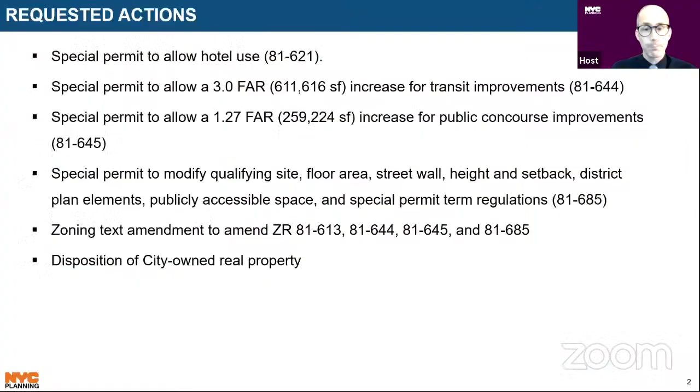Good afternoon, I'm Ezra Moser. This is an application by Commodore Owner LLC, a joint venture between RXR Realty and TF Cornerstone, for a new office and hotel development in East Midtown. Next slide, please.

The applicant is requesting 4 special permits, a text amendment, and a disposition of non-residential city property to facilitate a Class A office building and a hotel in East Midtown within Manhattan Community District 5. They're using a number of East Midtown special permits with some tweaks to the text to allow for the scale and unique location of the proposed development, as well as the size of their public improvement package.

The requested special permits are to allow use group 5 hotel use, which would result in a 500 key transient hotel; to allow a 3 FAR bonus for the provision of transit improvements; to allow a 1.27 FAR bonus for the provision of public concourse spaces; and to modify various East Midtown bulk provisions. Next slide, please.

The proposed development would contain 2.25 million square feet of office and hotel floor area. It would rise to 1,642 feet, with approximately 85 stories. It would undertake significant transit improvements and create a brand new transit hall for Grand Central Terminal. Additionally, it would provide 25,000 square feet of outdoor public space in the form of 3 elevated terraces that would wrap around the building and offer brand new views of the surrounding area.

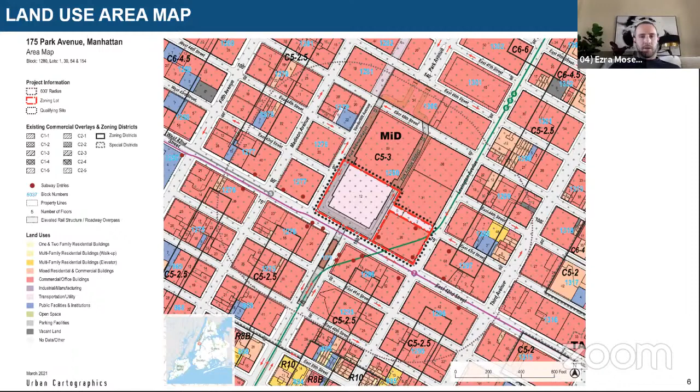Next slide, please. So the East Midtown subdistrict was established in 2017 in order to facilitate a new generation of state-of-the-art Class A office towers. The map on the left shows the location of the subdistrict within the Special Midtown District, and the map on the right shows the subdistrict with its various sub-areas. The development site is outlined in red on both slides.

Under the East Midtown regulations, sites that meet certain criteria are termed qualifying sites and are eligible to increase their maximum permitted FAR via a series of chair certifications. To jog everyone's memory, these include district-wide transfer of landmark floor area through the completion of pre-identified transit improvements in the public right-of-way, or for buildings built before 1961, through the reconstruction of overbuilt floor area.

Once developments achieve their maximum permitted FAR through these as-of-right mechanisms, they can increase their floor area by another 3 FAR, up to a total of 30, via 2 special permits for the provision of either site-specific transit improvements or by providing a public concourse. As a quick reminder, a public concourse is a public space that can be either indoors or outdoors. Next slide, please.

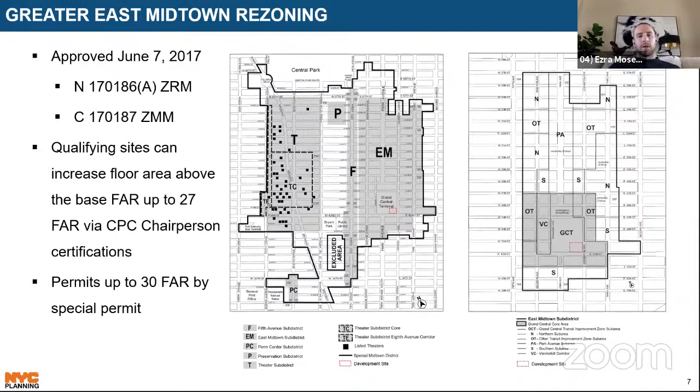Here you can see the development site in orange, side by side with the Grand Central Terminal zoning lot in blue. The development site is block 1280 lot 30, currently improved with the Grand Hyatt, with 275 feet of frontage along 42nd Street and 208 feet along Lexington Ave, for a total lot area of 57,000 square feet. The adjacent Grand Central Terminal zoning lot, colored in blue, is comprised of lots containing the terminal structure and Grand Central Market. It also includes subterranean transit parcels and an air rights lot, which was purchased by an affiliate of the applicant in 2017. That zoning lot has 146,580 square feet of lot area.

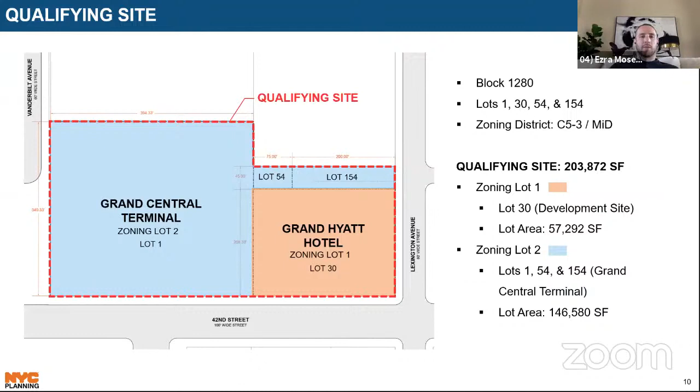Here's an elevation from Lexington Avenue. The qualifying site includes the Grand Central Market Building, which will remain.

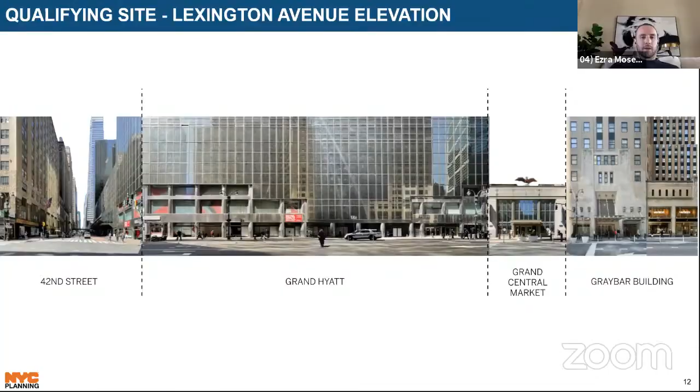As we also know from experience, its transit and pedestrian network can be extremely congested and confusing to navigate.

The development site, highlighted here in orange, is closely integrated with Grand Central Terminal and has multiple levels of transit infrastructure directly below it. The subway mezzanine, highlighted in green, occupies nearly 30,000 square feet of the below-grade footprint, more than half the development site's area.

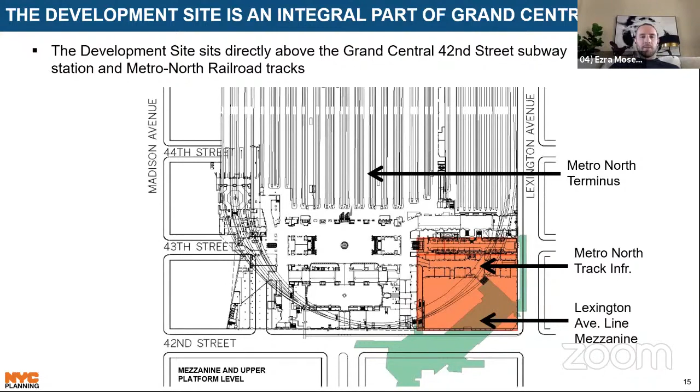Additionally, there are multiple layers of track infrastructure below that, including the Lexington Avenue platform, highlighted in green, and Metro North tracks, labeled with an arrow. The Flushing Line platform, highlighted in purple, runs at the edge of the development site's footprint. The development site is also directly adjacent to the terminus of both Metro North and the future LIRR terminus, highlighted in yellow. This extraordinary level of integration presents structural challenges for redevelopment, as well as opportunities for significant on-site transit improvements.

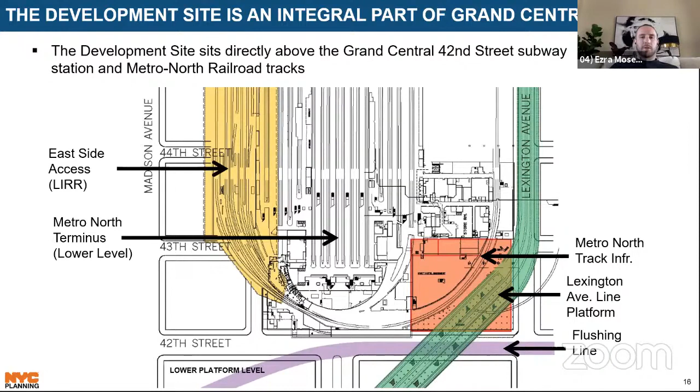At grade, the development site is similarly integrated with Grand Central Terminal's infrastructure. The Lexington Passage runs east to west across the site, providing access from Lexington Avenue to the terminal's main hall. Three subway entrances are located on the development site.

The Lexington Avenue entrance provides access from Lexington Avenue down to the subway mezzanine, also known as R239, or more colloquially, the Strawberry Stair. It was widened and improved recently as part of One Vanderbilt's suite of transit improvements.

Now, to familiarize you with the site further, I'll briefly show photos of two of those subway entrances, which the applicant proposes to renovate and expand as part of the proposed development.

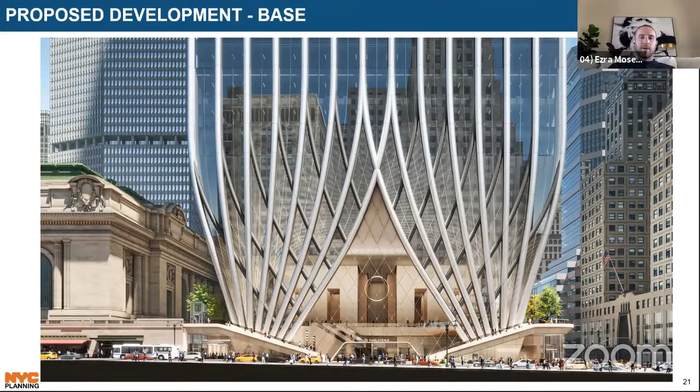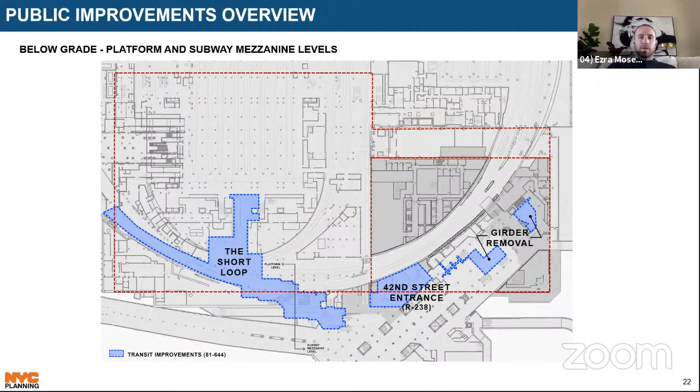As you'll see in the next slide, the proposed development will completely overhaul the 42nd Street entrance, which will also expand the mezzanine and make for a dramatically improved user experience. All the improvements seen here are part of the 81-644 transit improvement bonus, which is why they are shaded in blue.

At grade, seen here, the proposed development would undertake four major improvements. One, it would renovate the Lexington Passage and make it double height, seen in green along the northerly edge of the development site. Two, it would create a brand new transit hall, providing a three-way connection between the Lexington Passage, the 42nd Street Passage, and the subway station.

The transit hall is visible in green, running along the west or left-hand side of the development site. Three, as discussed on the previous slide, it would dramatically expand and improve the 42nd Street subway entrance, seen in blue just south of the transit hall. And four, it would relocate and refurbish the Lexington Avenue entrance, seen along the easterly edge in blue.

These are color coded to show that the two new subway entrances are part of the section 81-644 transit bonus, depicted in blue, and that the transit hall and Lexington Passage are part of the 81-645 public concourse, depicted in green.

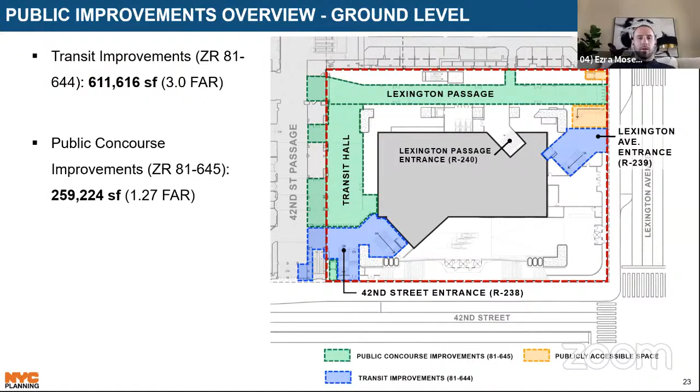Now I'll move through these improvements in detail, starting with the below-grade transit upgrades.

Here's the short loop connector in the context of the full suite of transit improvements. The short loop is a once-in-a-generation improvement that would transform an abandoned railroad track into a direct connection between Metro North's lower platform level, the future East Side Access Concourse, which you can see in the far top left-hand side of the screen, and then the subway mezzanine.

The mezzanine here is shown in green. Under current conditions, Metro North commuters arriving on those lower platforms must travel up to grade and through the terminal complex before traveling back down below grade again to access the subway mezzanine.

Future Long Island Railroad commuters would similarly be required to take escalators up into 1 Vanderbilt's transit hall before making their way back down to the subway mezzanine by the shuttle passageway in Grand Central Terminal. As currently designed, users for both Metro North and the Long Island Railroad are required to take circuitous and inefficient routes to access the subway, which the short loop would address.

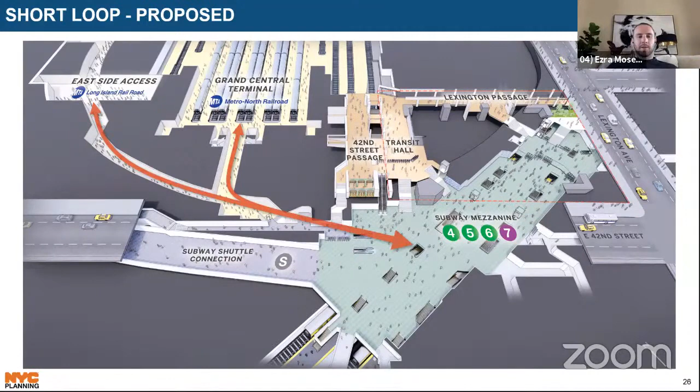The applicant would remove multiple girders and empty back of house spaces from the mezzanine level of the Grand Central 42nd Street subway station, which you can see here in various shades of green.

Removing these girders would add over 2,600 square feet of circulation space and allow for new turnstiles at the mezzanine's northern end. The mezzanine would be transformed from the labyrinth that we all know today into a more legible space with very clear sight lines. The removal of these obstructions and the new sight lines would redistribute passengers from visible but congested platform stairs to ones that are currently obscured and underutilized.

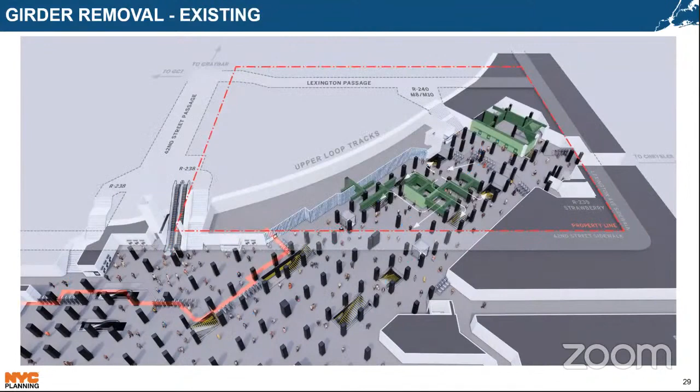Since there was a lot of information on these two slides, I'm going to show them again. Here's the existing mezzanine, with the girders highlighted in green. Here's the same view in the proposed condition with the girders removed. You can see how much more open and streamlined it is.

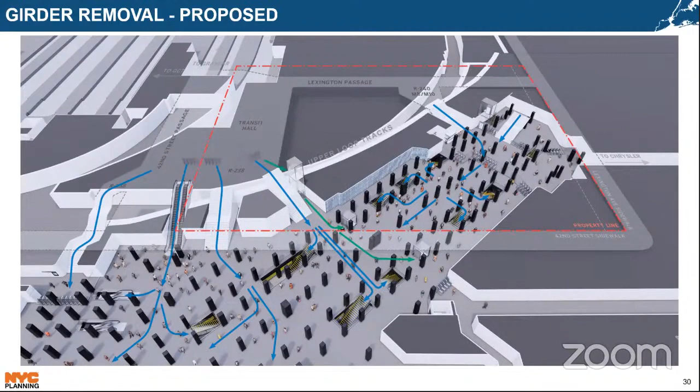Here's another existing conditions view at the northern end of the mezzanine. This white wall in the middle of the shot is one large girder. Here's how that same view would look in the proposed conditions, revealing the relocated strawberry stair entrance in the center of the screen.

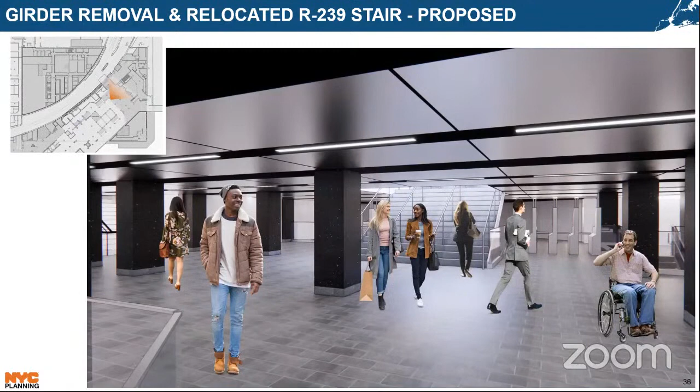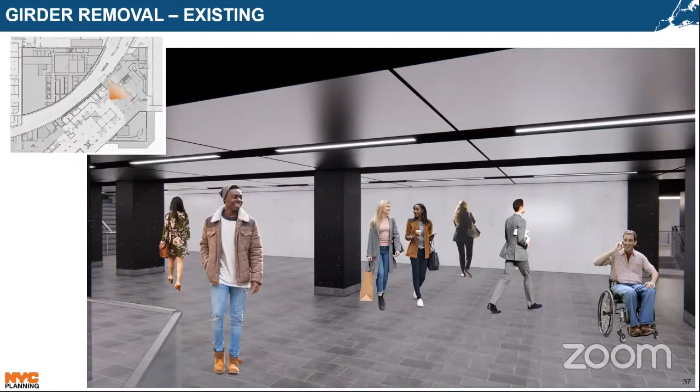I'm going to show the same before and after sequence again for emphasis. Here is the existing conditions view at the northern end of the mezzanine, and here it is in the proposed conditions with the girders removed.

This slide highlights the integration between the proposed transit hall and the expanded 42nd Street subway entrance, both of which are stacked to the westerly side of the development site. Additionally, the proposed transit hall would remove large portions of the wall separating it from the 42nd Street passage. This slide also shows the relocation and expansion of the Lexington Avenue entrance on the right-hand side of the image. The building's street walls would be set back from both Lexington and 42nd Street, expanding the effective width of those sidewalks.

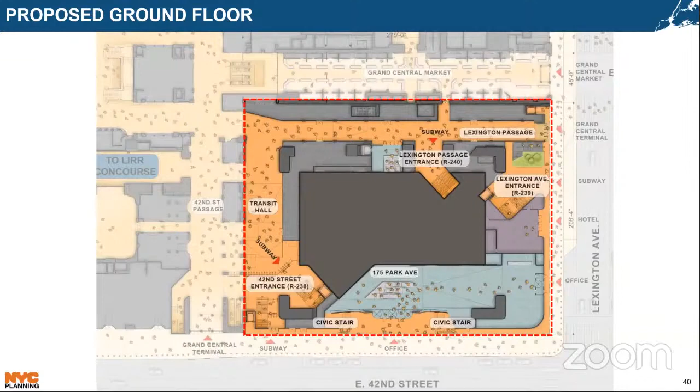Overall, key takeaways: the public realm will constitute a significant portion of the proposed development's ground floor.

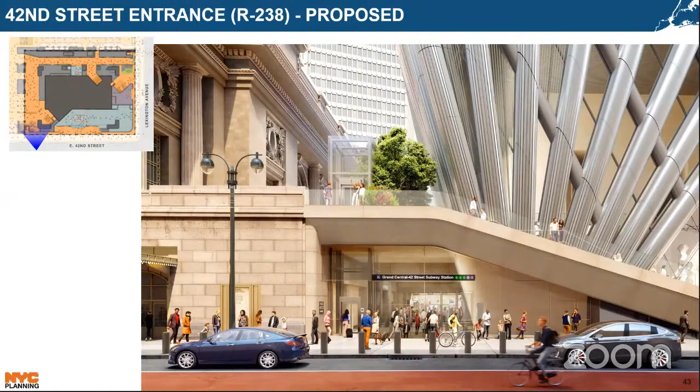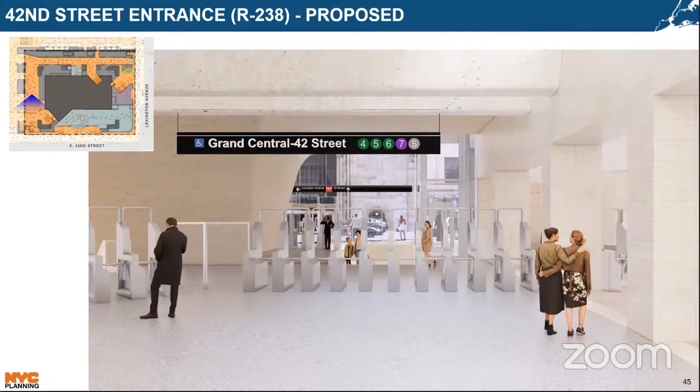Turnstiles would be relocated from the mezzanine level up to the ground floor, which would increase the mezzanine level's paid zone by about 3,500 square feet and relieve congestion and improve circulation. Placing the turnstiles here at grade will also help clearly indicate the subway entrance to users within the terminal.

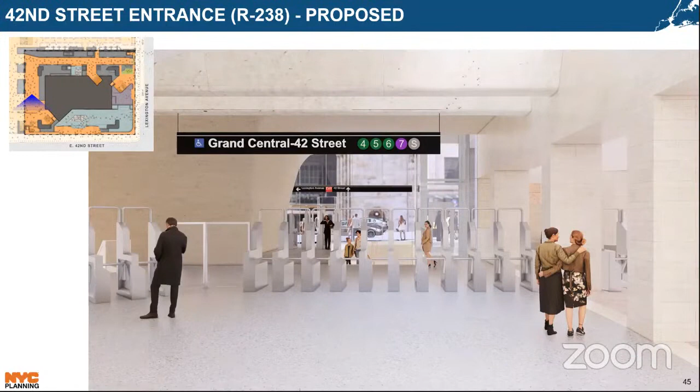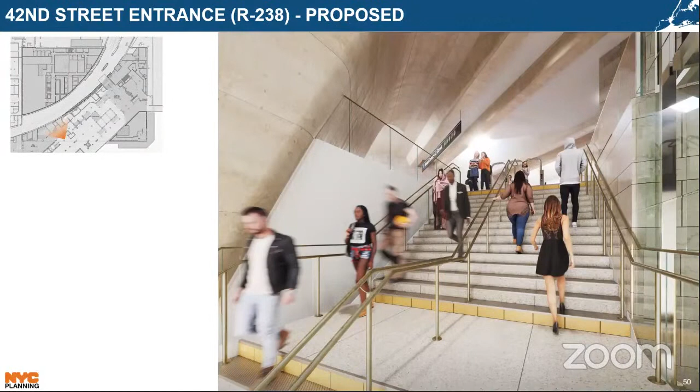Here's a similar view in the proposed conditions. You can see how the stairs have been relocated away from the escalators and the fare array has been redistributed to the ground floor, both of which would ease bottlenecks. Now we will move on to the Lexington Avenue entrance.

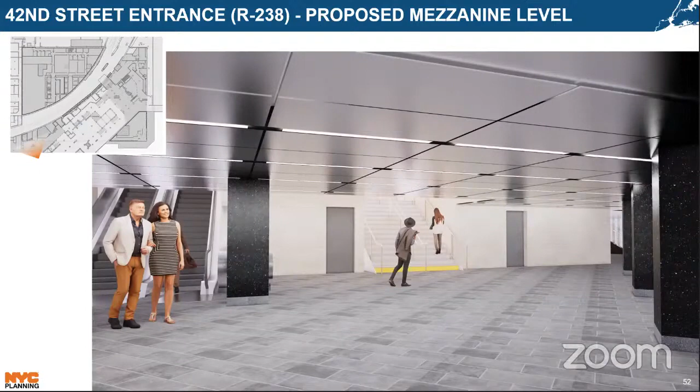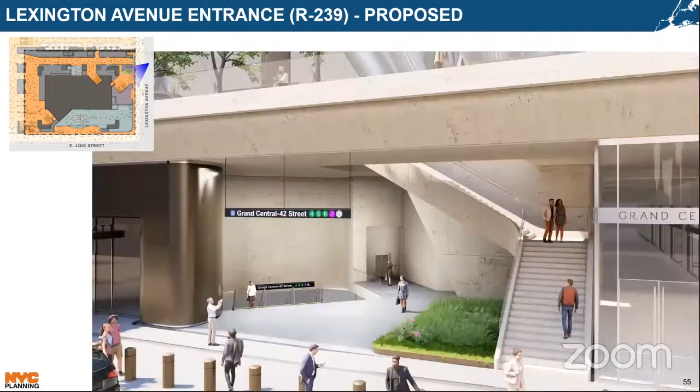In its current conditions, the entrance is perpendicular to the primary flow of passengers, which causes congestion as people cut across the primary flow to access it. We'll now move on to the proposed transit hall.

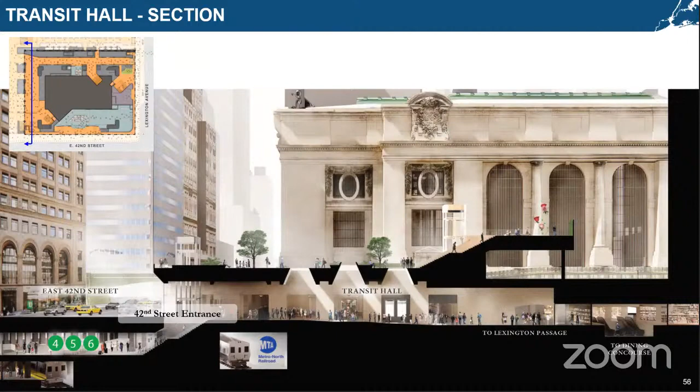Here's a rendering of the transit hall. You can clearly see its direct sight lines to the new 42nd Street subway entrance. And as you can see on the left-hand side of the image, retail would line its easterly side.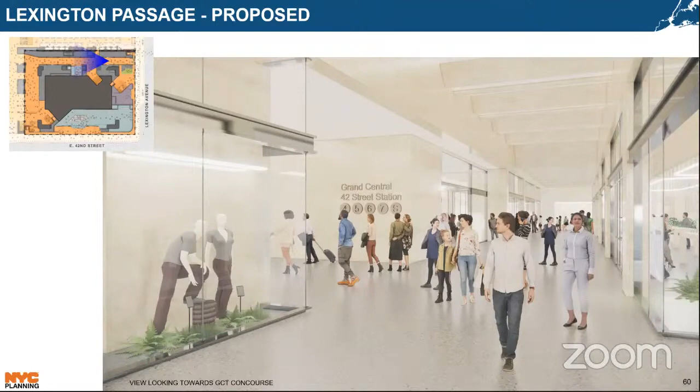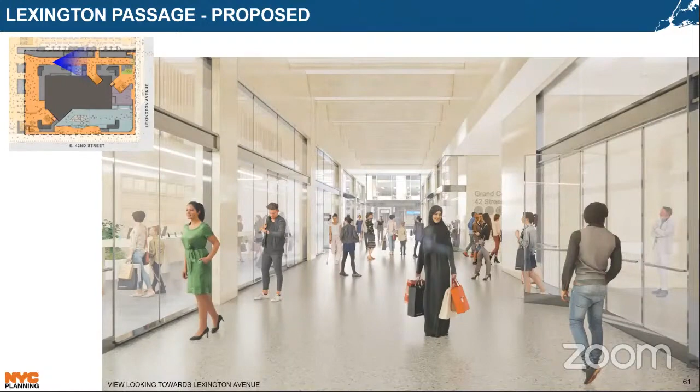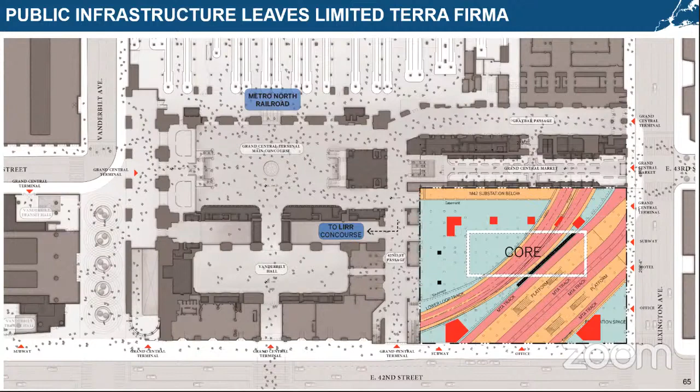As we touched on earlier, the building's design and form are largely being driven by its below-grade conditions and the limited opportunities for terra firma. To redevelop, columns have to be threaded between commuter rail tracks and MTA infrastructure. In particular, structural columns would have to be bundled to land at the only 2 points along East 42nd Street where mega columns could be located on terra firma. You can see these as the particularly large red columns located towards 42nd Street.

So the building's superstructure has to pinch inwards at the base in order to land at these mega columns, which creates a number of unique opportunities for the base's design. The proposed development would align its single-story plinth with that of Grand Central at about 26 feet above curb level. The plinth would provide space for the creation of 3 elevated open-air public terraces, which I will detail shortly. And these are located above the plinth and are visible just above the red arrows that appear to pinch inwards.

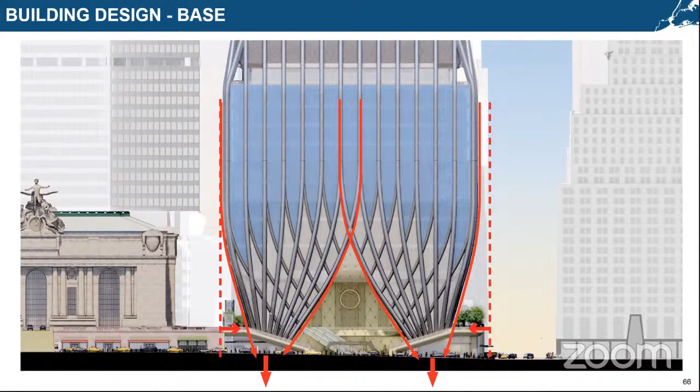So the 3 terraces would have a combined area of 25,000 square feet. Moving clockwise from the left, we have the Grand Central Terrace, the GRAYBAR Terrace, and then the CHRYSLER Terrace. Under East Midtown regulations, the proposed development is required to provide a mandatory 10,000 square foot unenclosed public space, which the CHRYSLER Terrace will satisfy. The applicant is also providing the Grand Central Terrace and GRAYBAR Terrace in addition to that, which have 15,400 square feet of area and are seeking a floor area bonus under the 81-645 public concourse special permit.

Vertical circulation is highlighted in blue, and as you can see in the image, the 3 spaces are tiered and connected so they can be navigated in continuous fashion. Along East 42nd Street, 2 grand stairs would emerge from the center of the development site and would rise in opposite directions to provide access to the terraces. A secondary set of stairs on Lexington provides access to the CHRYSLER Terrace. Each terrace is ADA accessible and the respective elevators are highlighted in pink.

In most instances, the agency's position is that elevated public spaces are not appropriate. However, in this case, with such a crowded high volume streetscape and where you have the opportunity for unique viewing platforms and new vantage points, we felt that this would be both a unique and appropriate public space typology. We have examples like the elevated acre or the High Line where being above grade can feel really special. So the agency is not concerned that its elevated nature is going to render it an underutilized or unsafe space. All 3 spaces are subject to PDC review and input, and the next stage of PDC review will take place after the City Council phase of ULURP.

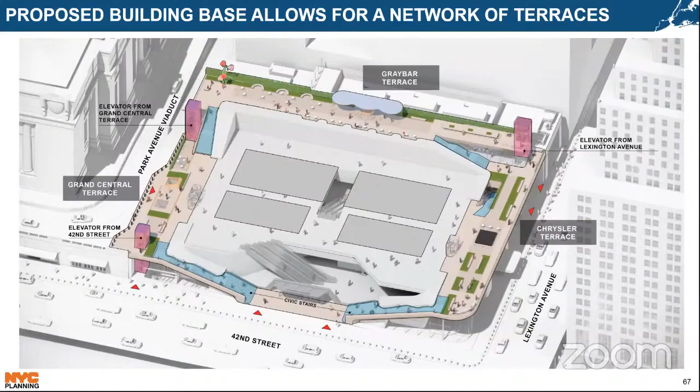The terraces would be accessed from 42nd Street by a pair of grand civic stairs that would rise 26 feet. Each stair would have a width of approximately 19.5 feet and a run of 78 feet. 3 landings ranging from 11 to 13 feet deep would allow users moments of pause to appreciate views along East 42nd Street.

Here's a plan view of the 3 terraces and their programming. We have the Grand Central Terrace on the west, the left side of the screen, the GRAYBAR Terrace to the north, and the CHRYSLER Terrace to the east. Each space has slightly different programmatic themes, but they generally allow for a variety of passive activities and provide opportunities for unique views of the surrounding area. I'll go through each plaza in further detail over the following slides.

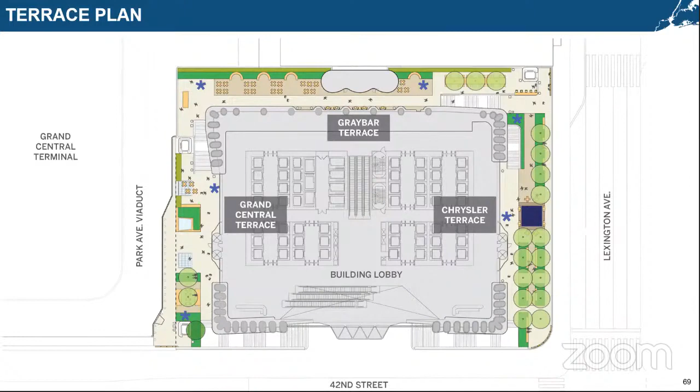All 3 terraces would feature rotating art installations, represented by the blue asterisks, and an 8-foot wide circulation path would allow for circulation through all 3 terraces. I'd like to flag that the applicant would like to close the GRAYBAR Terrace overnight between 9 p.m. and 7 a.m., and would like to close the Grand Central and CHRYSLER Terraces for nightly cleaning between 1 a.m. and 7 a.m.

The 7,300 square foot Grand Central Terrace would be located 26 feet above grade and would provide brand new up close views of the terminal's eastern facade. Note this view is rotated 90 degrees counterclockwise, as you can tell from the map key in the top left corner. The terrace would be anchored by 3 skylights, shown in pale blue, which would provide daylight to the transit hall below. There would be a southerly seating area with fixed benches and trees and a balcony-like alcove to the north that would feature a variety of seating types.

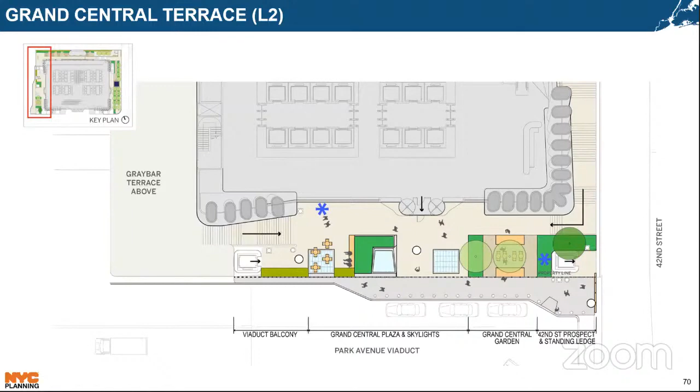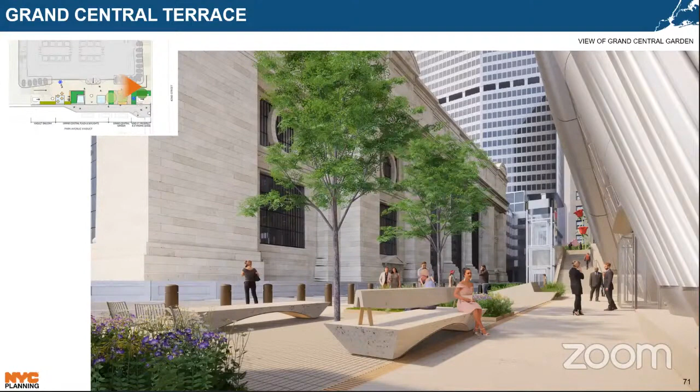Here's a rendering of the space from the southerly end looking north. You can use the key again in the top left corner to orient yourself. You can see the variety of seating and planting types in the foreground, and then on the right towards the end of the plaza, you can clearly see stairs and an ADA elevator, which provide access up to the GRAYBAR Terrace.

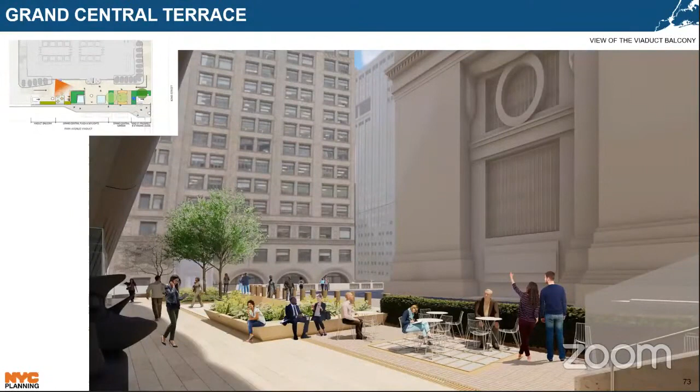The 8,000 square foot GRAYBAR Terrace would connect the Grand Central Terrace to the CHRYSLER Terrace and would rise an additional 16 feet above them both. It would be 42 feet above curb level and would provide new elevated views of both Grand Central and the landmarks along Lexington Avenue. The GRAYBAR Terrace would contain a number of amenities offering passive use of the space and could accommodate public programming and cultural events.

A clear glass food and drink kiosk would be located at the center of the terrace so that the space remains active and inviting year-round. Viewing platforms would be located at the eastern and western ends of the terrace. The space would feature extensive bench seating, movable tables and chairs, and a large communal table with movable seating.

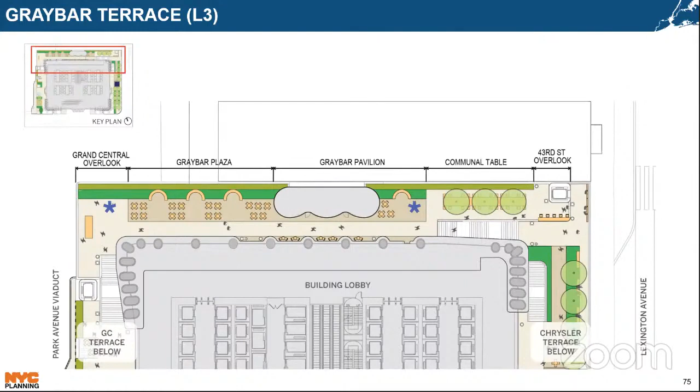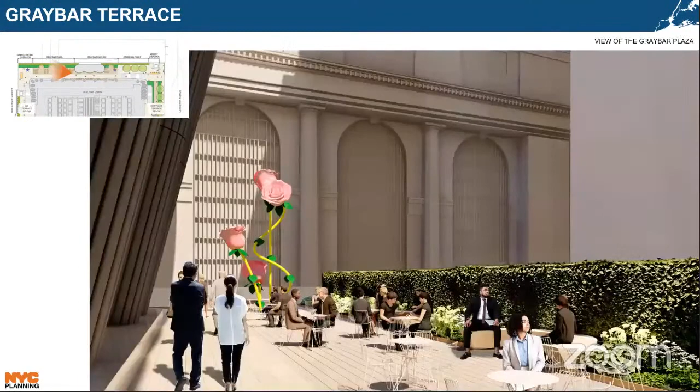Here's a rendering of the GRAYBAR Terrace from its eastern half, looking west towards Grand Central. You can see the food and drink kiosk in the foreground, which anchors the terrace. Here's a similar view from further west, and you can see the prominent view of Grand Central's facade and the variety of seating on the terrace's western half.

Here's a view from the easterly viewing platform looking at the Chrysler Terrace below and then the Chrysler building to the left. You can see a high top table and chairs in the foreground.

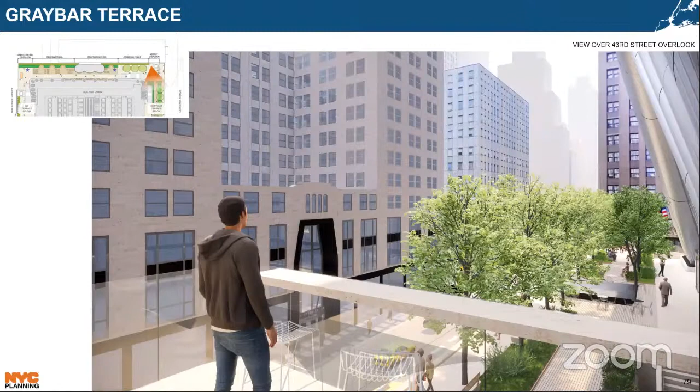The mandatory 10,000 square foot Chrysler Terrace would be the largest of the proposed development's three public terraces. Seen here, it's rotated 90 degrees counterclockwise. It would be anchored by a centrally located reflecting pool, surrounded by movable tables and chairs. It would feature groves of high branching trees, bench seating, two viewing balconies, and a food and beverage retail establishment at its northern end.

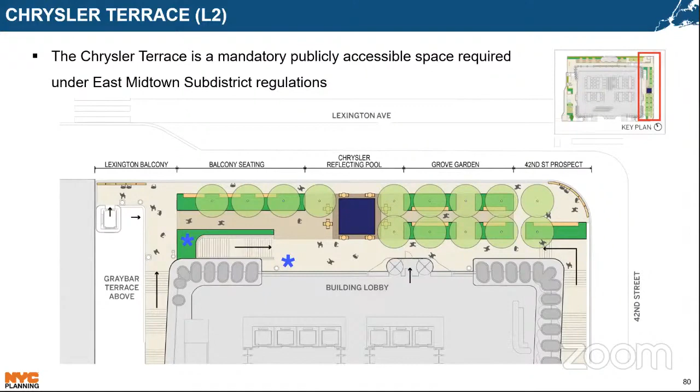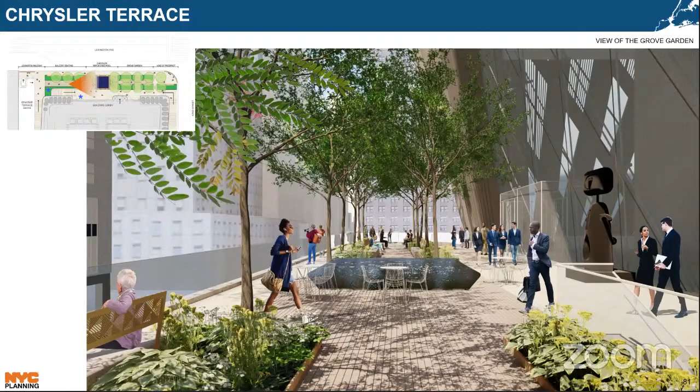Here's a rendering of the Chrysler Terrace looking south towards 42nd Street. You can see the reflecting pool in the foreground, and then access to the building lobby can be seen on the right.

Here's a rendering of the terrace looking south, which highlights the elevated views of the surrounding landmarks.

Here's a view from the southern viewing balcony with the Socony Mobil building featuring prominently in the background.

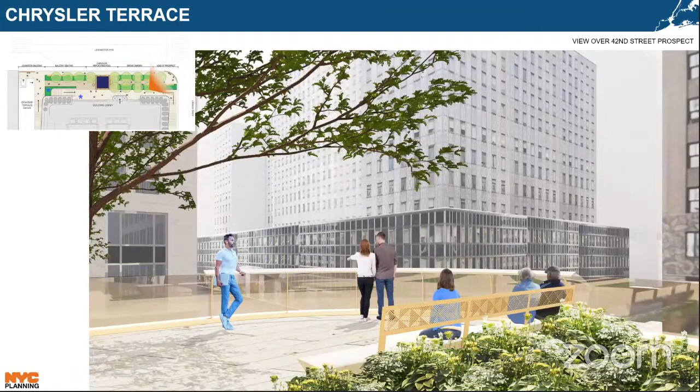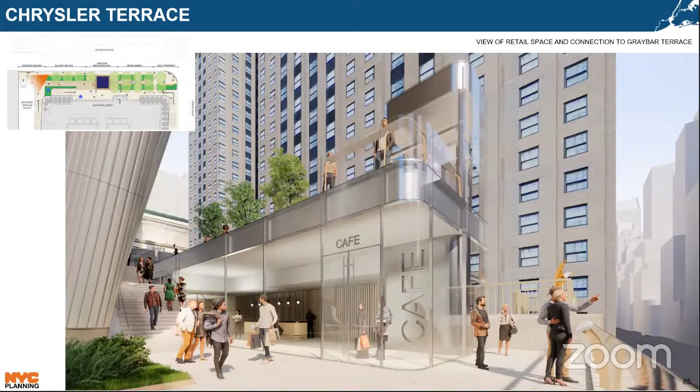Given the multi-level nature of the public terraces, the applicant will provide detailed wayfinding signage to help the public access the terraces. The details would be finalized post-ULURP were the project to be approved. The version depicted here is purely illustrative, and we welcome feedback from the Commission. We also note that PDC has jurisdiction over the wayfinding too.

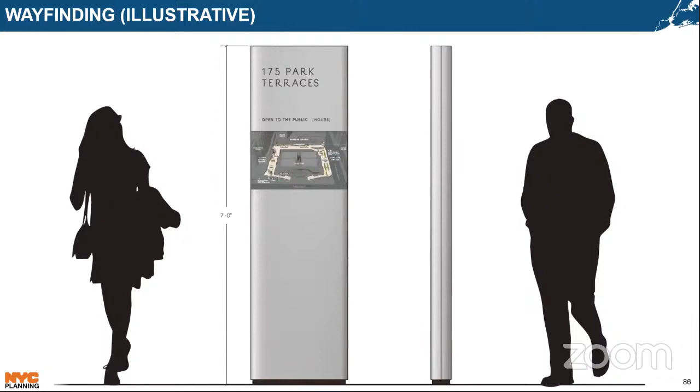So now we'll quickly go through the proposed building in its context.

Here's an elevation in context, viewed from 42nd Street. The building will set back from the street line 5 feet on both 42nd and Lex, and would rise to 1,642 feet and approximately 85 stories. Floor plates would range from 34,000 to 50,000 square feet, and floor to floor heights would range from 14 to 20 feet.

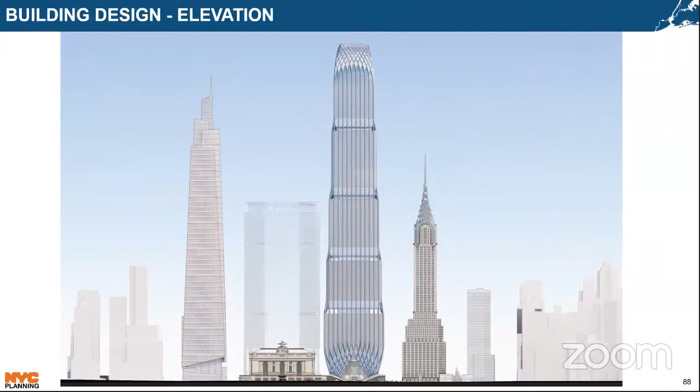The proposed development's core would set back from the street line and would be aligned with the terminal's setback from 42nd Street. The stone cladding of the proposed development's plinth and its core would reference the color spectrum of granite and limestone seen in the terminal on the left. As mentioned earlier, the structural columns are bundled to land at the only two points along 42nd Street where mega columns can be located on terra firma, which creates this parting of the curtains effect on the facade.

A key advantage of this massing is that the parting of the columns allows for improved views of Grand Central Terminal from 42nd Street.

The building would provide a series of four 10-foot setbacks, eventually forming a porous woven crown approximately 60 feet tall. As you can see here, the crown's design is intended to reference the lattice of the base.

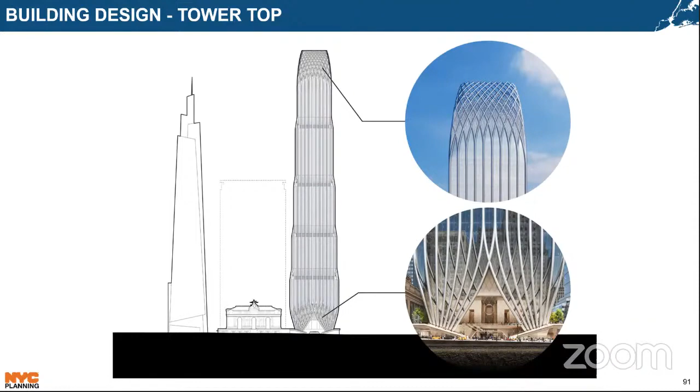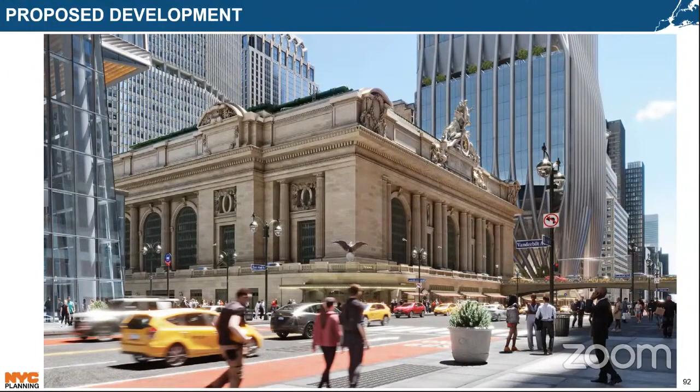Here's a view of the proposed development from 42nd Street looking east. This view emphasizes its relationship with Grand Central when viewed from this direction. One Vanderbilt can be seen in the foreground to the left.

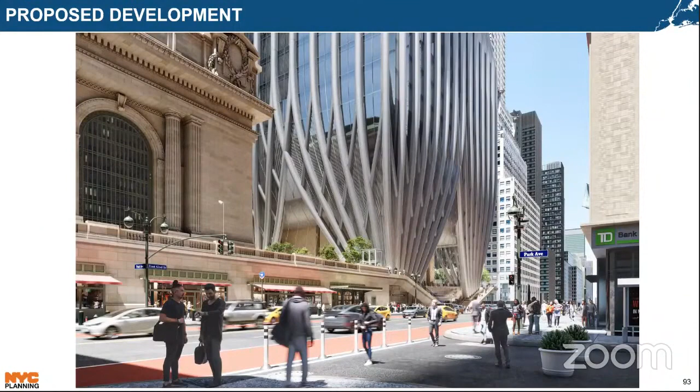Here's a closer view of the development from 42nd Street looking east.

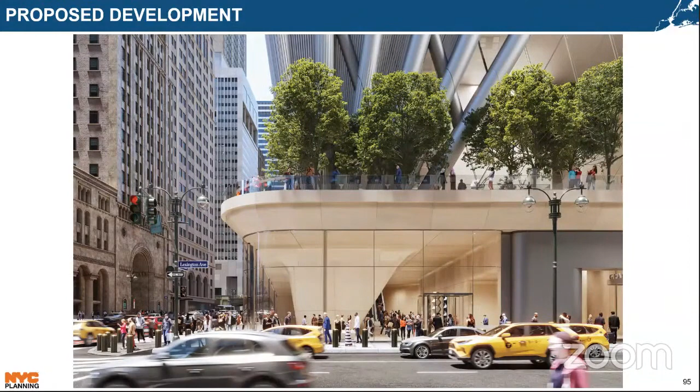This shows the proposed building's base viewed from the intersection of 42nd Street and Lex looking west. This is the Lexington Avenue portion of the office lobby entrance.

Now we will briefly go over the requested waivers.

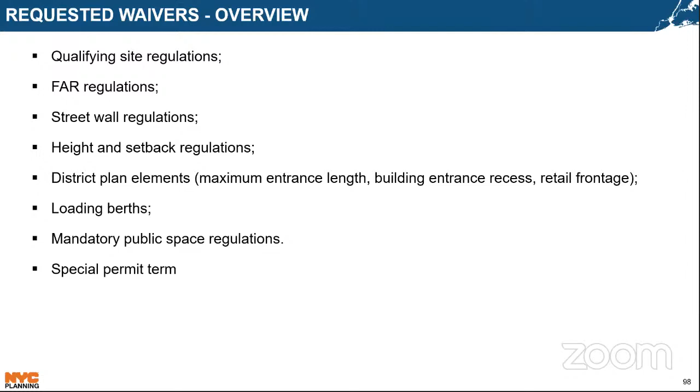Pursuant to 81-685 and 81-645, the applicant would be seeking a number of waivers to various provisions of the East Midtown Subdistrict regulations in order to facilitate the proposed building. These are listed below on the slide.

So the proposed development requires modifications to the qualifying site regulations in order to form a single qualifying site with Grand Central's zoning lot and utilize the unused floor area from the terminal.

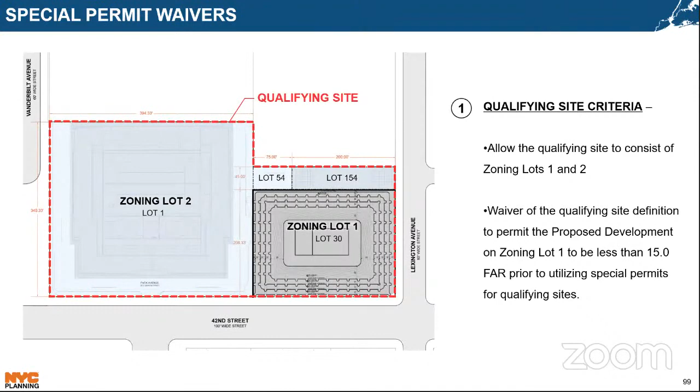Modifications to the East Midtown floor area provisions are required to allow the proposed development to increase its floor area via the two bonus special permits instead of the as-of-right framework.

The proposed development requires modifications to the street wall regulations in order to facilitate the proposed design and to allow space for the elevated public terraces.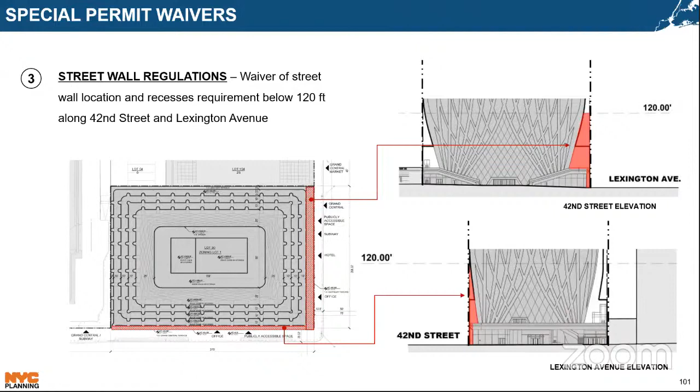The development also seeks height and setback waivers to facilitate the building's massing, design, and floor plates.

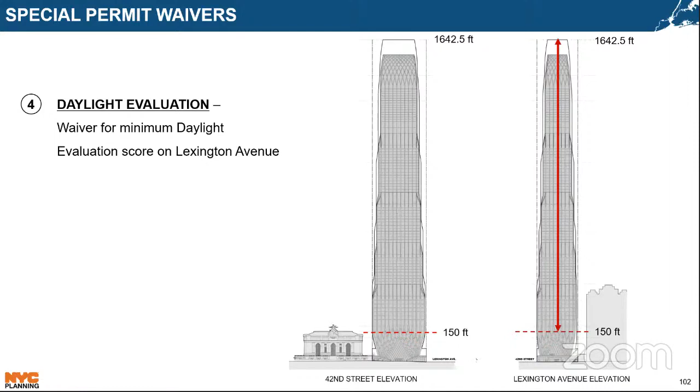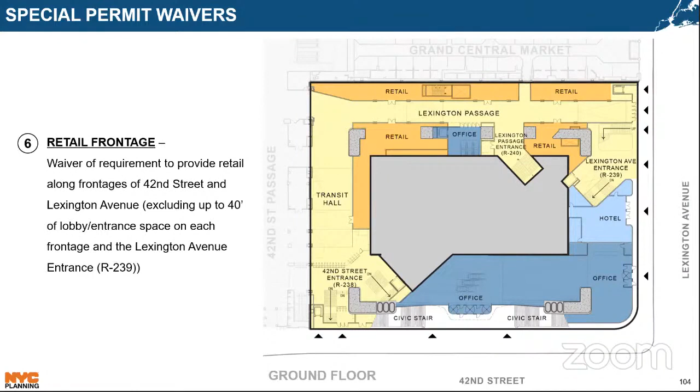It also includes modifications of the retail frontage requirements along 42nd Street and Lexington.

It also includes modifications to the maximum length and depth of building entrance recess areas.

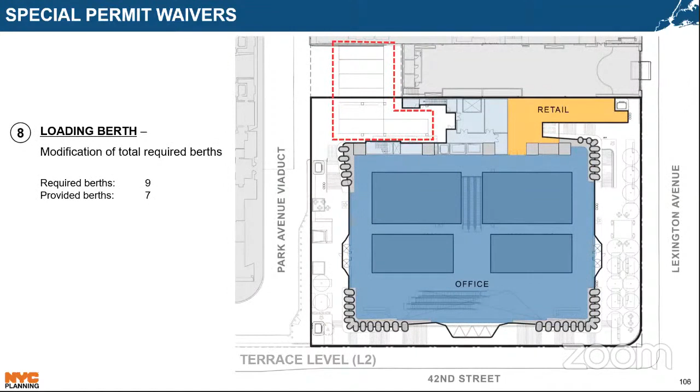Additionally, the applicant is requesting a reduction in required loading berths, which would facilitate the provision of the GRAYBAR terrace.

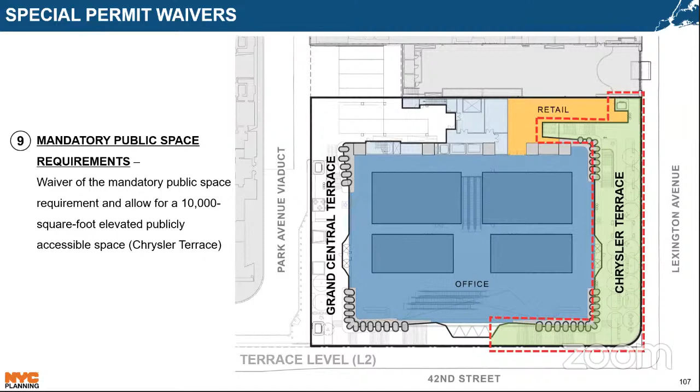The applicant is requesting a waiver of the mandatory public space design requirements in order to allow for the provision of the elevated CHRYSLER terrace. In lieu of the regulations that would normally apply, the applicant is setting forth detailed bespoke design requirements for the space in the restrictive declaration.

Lastly, the applicant is requesting a modification to 11-42(a) to allow a single 10-year term to complete substantial construction. A term of 10 years is often given to multi-building developments, and in this case, the request reflects the unprecedented complexity of the site conditions and the need for careful long-term coordination with MTA in order to complete the transit improvements.

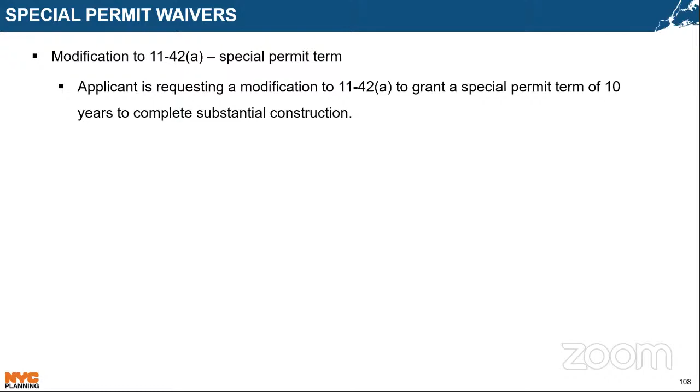I'll provide a quick summary of the requested text amendments.

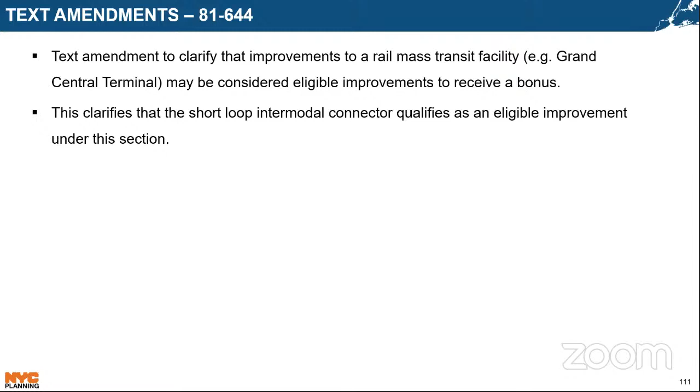81-644 is the transit improvement special permit, and the applicant is amending it to add extra clarity that improvements to a rail mass transit facility, such as Grand Central Terminal, can receive a bonus. Specifically, this makes it abundantly clear that the short loop intermodal connector qualifies as an eligible improvement under this section. When we developed the East Midtown text, we wanted to give the flexibility for improvements of this type to be eligible, but we didn't actually anticipate that something as ambitious as the short loop would be on the table for a developer to undertake.

The applicant's amending section 81645 to give the commission the authority to modify bulk regulations to facilitate a public concourse's design. The applicant is requesting a waiver under this section to reduce the number of required loading berths, which would facilitate the creation of the GRAYBAR terrace, and would allow the CHRYSLER terrace and Grand Central terrace to be connected as a single continuous open air public space.

Section 81685 specifies which zoning regulations the commission may modify with respect to qualifying sites in East Midtown. The applicant is looking to modify a series of regulations by special permit that are not currently covered by the existing text. This would allow the Grand Central Terminal zoning lot and development site zoning lot to be considered a single qualifying site. It would allow the proposed development to utilize special permit bonuses, even though the proposed development would not exceed 15 FAR. It would also allow the floor area bonuses from the transit improvement special permit and the public concourse special permit to be used in combination, each for up to a maximum of 3 FAR, to facilitate major public improvements to both the below and above grade public realm.

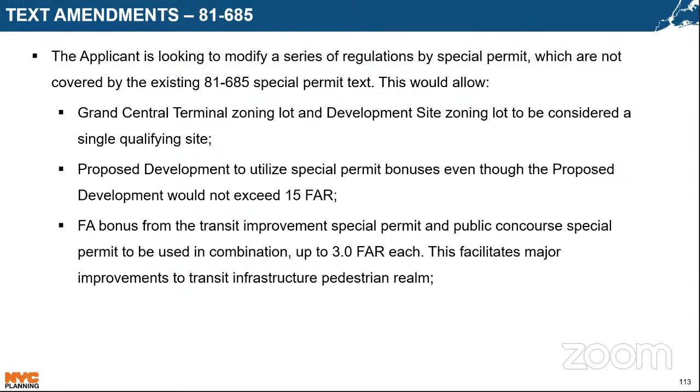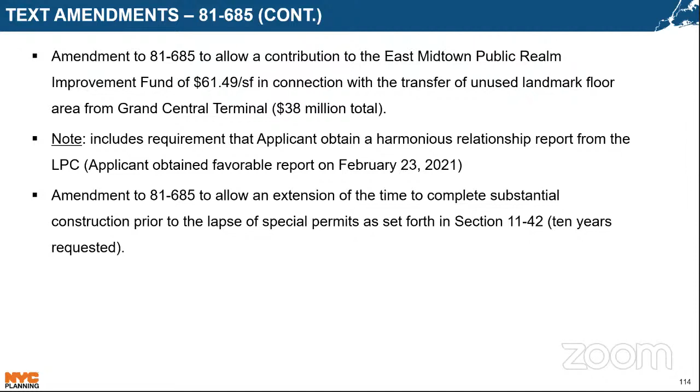Additionally, 81685 would be amended to allow a $38 million contribution to be made to the Public Realm Improvement Fund in connection with the transfer of unused Grand Central floor area. The text amendment would also require the applicant to obtain a harmonious relationship report from the LPC. LPC voted February 23rd, 2021 to provide a positive report to the CPC. Additionally, 81685 is being amended to allow for a single 10-year term to complete substantial construction prior to the lapse of the special permits as set forth in section 1142.

Lastly, the applicant is amending the definition of public realm improvement fund in section 81613 to allow for payment into the fund for the unused Grand Central floor area.

I will briefly review a summarized version of the special permit findings. Here's an abbreviated version of the findings pursuant to 81621. You can find the full findings in your briefing packet. To reiterate, the applicant is requesting the special permit to allow a 406,000 square foot hotel with approximately 500 keys. The key findings here are that the hotel contains business-oriented amenities.

Here's an abbreviated version of the findings pursuant to 81644. You can find the full findings again in your briefing packet. The key findings here are that transit improvements will increase accessibility, security, connectivity, and vertical circulation, and that where possible, they'll be integrated into the development's footprint and will allow for daylighting and improved user orientation.

Here they are for 81645, and again the full version is in the briefing packet. A key finding here is that the concourse be designed in a manner that combines separate spatial elements into a cohesive and harmonious site plan.

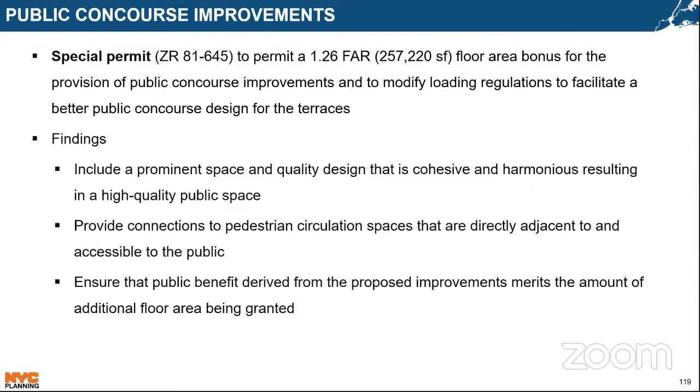Here's a summary of the findings for 81685. Again, the full version is in the briefing packet. Some key findings here are that the proposed modifications will allow for a better site plan and will further the subdistrict's objectives of facilitating a new state-of-the-art sustainable class of office towers.

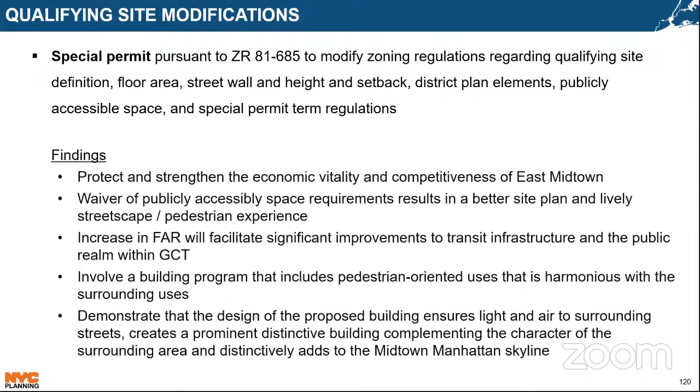So lastly, I'll touch on the disposition action and the EIS. So a quick note on the disposition.

The ground lease that was negotiated as part of the 1977 GPP included a reversion clause. This means that in the event that the ground lease is amended and restated, as would be required to facilitate the proposed development, the property would revert from state to city ownership. Because of this reversion clause, a disposition action is required in order for the applicant to redevelop the property.

Due to the disposition action, the building's overall design and the public spaces are also subject to PDC review. PDC held a conceptual hearing for this proposal on March 22nd, and the next phase of their review will happen after the City Council stage of ULURP. DCP is working very closely with PDC on this matter.

Also, in addition to the requested actions before you, the applicant is also applying for two chair certifications to reconfigure existing transit easement volumes on their site. These certifications are part of the current East Midtown regs. The applicant is also pursuing a number of non-zoning approvals related to the amendment and restatement of the ground lease.

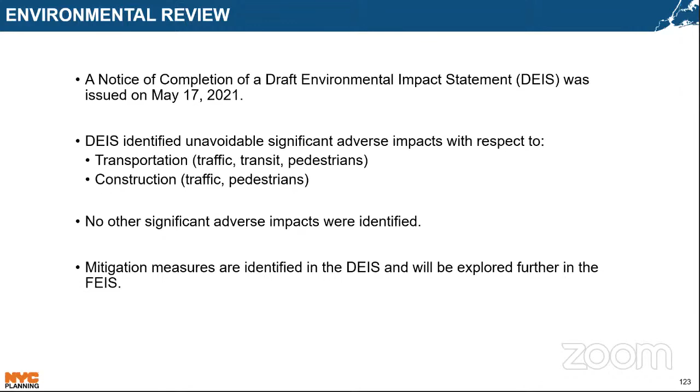A draft EIS was prepared for the project, and DCP was the lead agency. There is a potential for transportation-related traffic, transit, and pedestrian impacts, as well as construction-related traffic and pedestrian impacts. Mitigation measures have been proposed for these impact categories, all of which is detailed in the DEIS materials published.

So here's where the presentation concludes, and happy to take any questions.

Thank you so much, Ezra. I think we need to take just a pause to have it all sink in. Questions from any commissioners?

Commissioner Burney: I don't really have questions yet, but just in terms of clarifications, Ezra, that was quite a marathon presentation you gave us there, so compliments to you. I was a little unclear about what's happening with the TDR payments to the Public Realm Improvement Fund. Could you just explain that a little bit more? You said something about $61 a square foot, but where is that going, and what's the relationship with the price that was paid for the development rights by the developer?

For the price that was paid by the developer, I think that's probably a question best addressed at public hearing. I don't know that, but I do know that the $61.49 per square foot is the minimum contribution currently for transfers in the East Midtown framework, and so it would be deposited into the public realm improvement fund, similar to the transfer from 270 Park, for example.